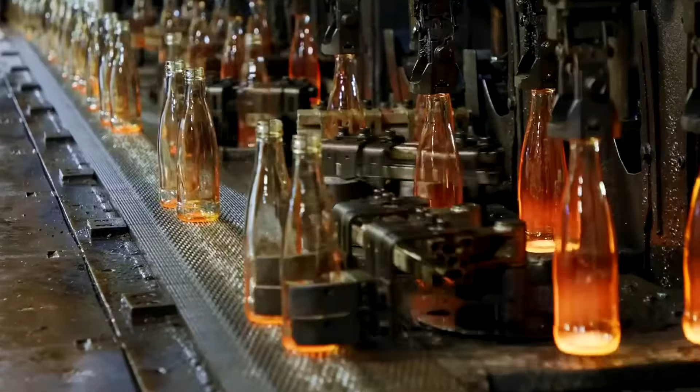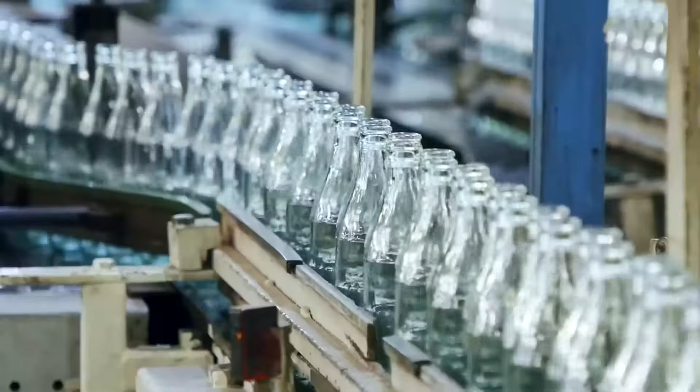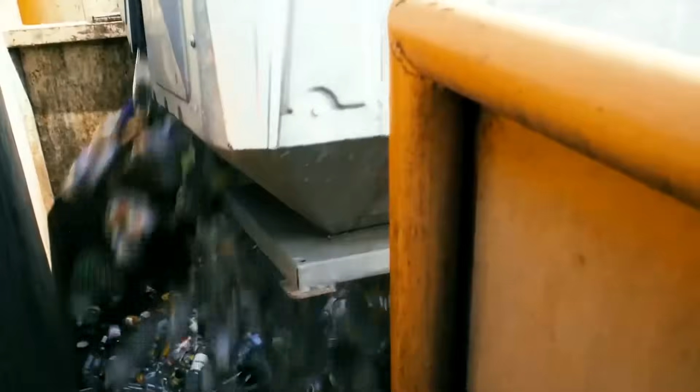But this material holds a remarkable secret. Glass can be recycled forever, reborn time and again, without any loss of its inherent quality or purity. The journey from messy, broken shards back into clean, shiny bottles is a testament to this unique potential. This transformation unfolds inside one of the world's largest glass recycling factories, where hundreds of tons are brought back to life every single day. Here we uncover the secrets behind the unbelievable journey of one of the most sustainable materials on Earth. An object designed to be discarded, yet it holds a hidden currency.

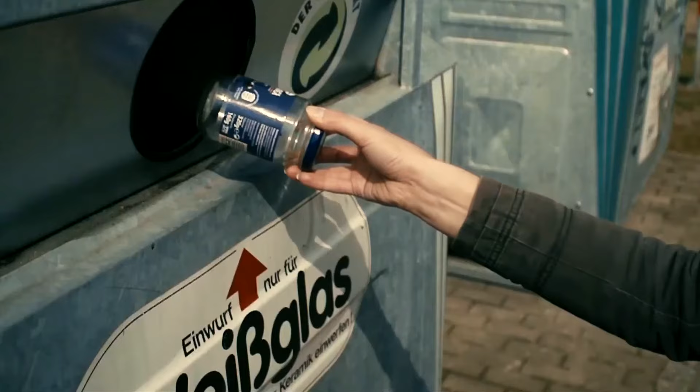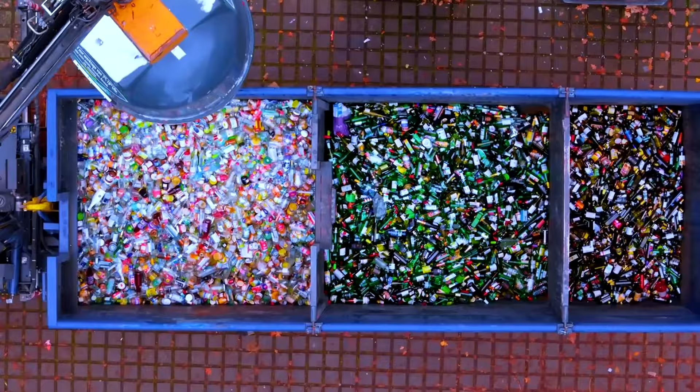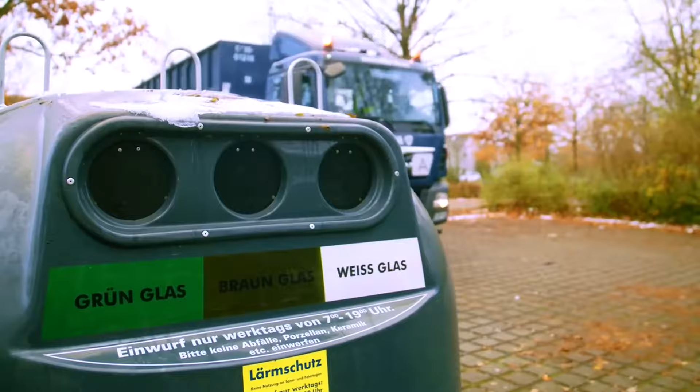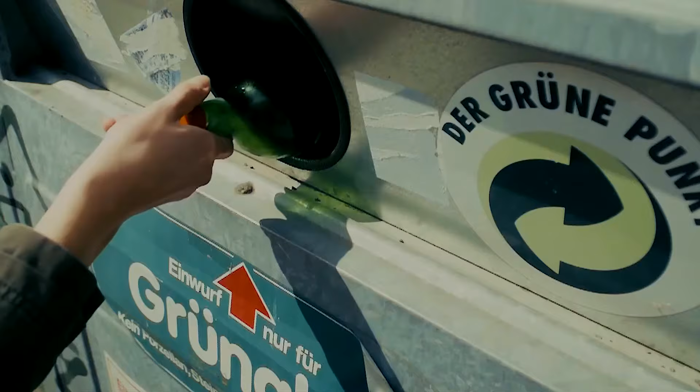The lifeblood of glass recycling is a steady supply of used bottles, but when they are mixed with household waste, sorting becomes a costly and complicated task. In many parts of Europe, an elegant system intercepts these containers right at the source. Automated return machines dot city streets, inviting people to deposit their empties. An internal scanner identifies each bottle before it is sorted, and the machine dispenses a small refund, usually around 10 to 20 cents. This simple transaction transforms a finished bottle from potential waste into a tangible asset, encouraging public participation and providing factories with a continuous flow of glass that is already clean, pre-sorted, and consistent.

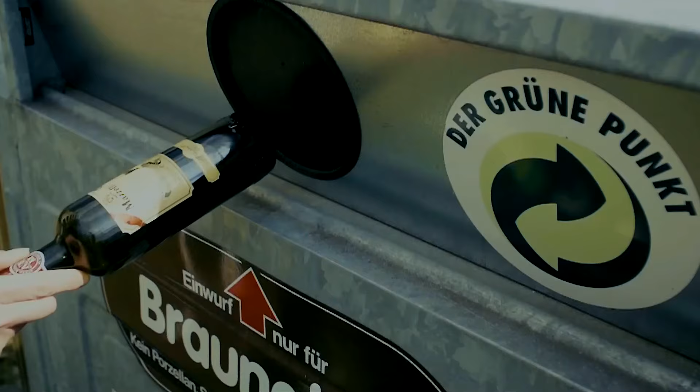Once these reverse vending machines reach capacity, specialized collection trucks are dispatched. Large plastic bins, each one brimming with thousands of empty bottles, are hoisted aboard by forklifts. A single truck can carry between 20,000 and 30,000 bottles in one trip, a load weighing approximately 10 to 12 tons, as it makes its way from collection points to the recycling facility.

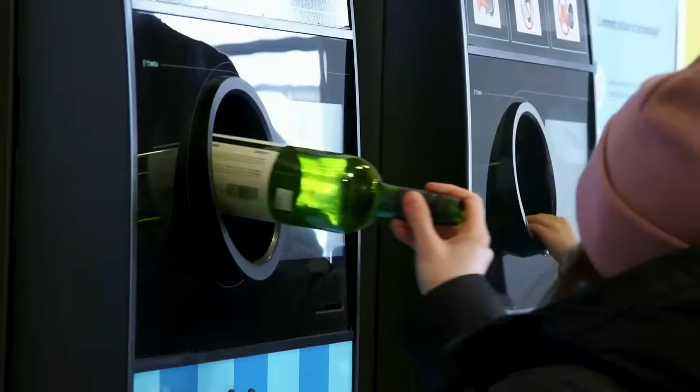Arriving at the plant, drivers back their trucks up to a massive storage bay and release the entire load. A cascade of glass tumbles out, the sound echoing as the ground fills with sparkling mountains of green, brown, and clear. These shimmering heaps are not an endpoint, but the genesis of the entire recycling process, a vast reserve of raw material waiting to be crushed and reborn.

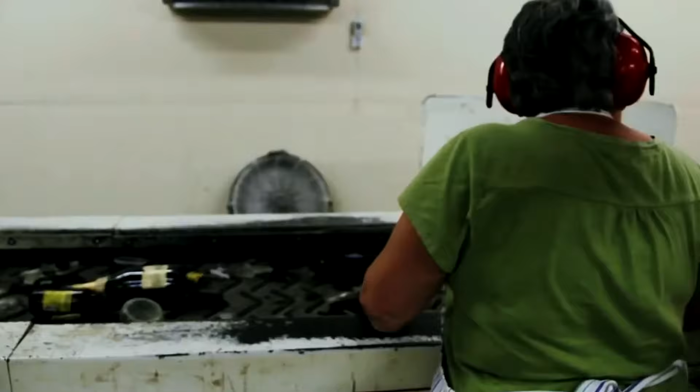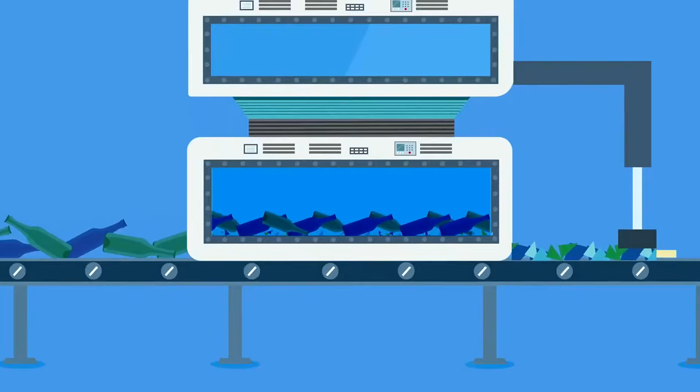It begins with a symphony of destruction. A mountain of discarded glass, shimmering under the open sky, is about to be reborn. Massive loaders ascend the towering piles of waste, their buckets scooping up enormous quantities of shattered material. They traverse the yard and, with a thunderous crash, empty their contents into the plant's feed hopper. A cascade of shards tumbles down a steel chute onto a waiting conveyor, which immediately begins to carry the stream of glass, dirt, and sand deep into the facility.

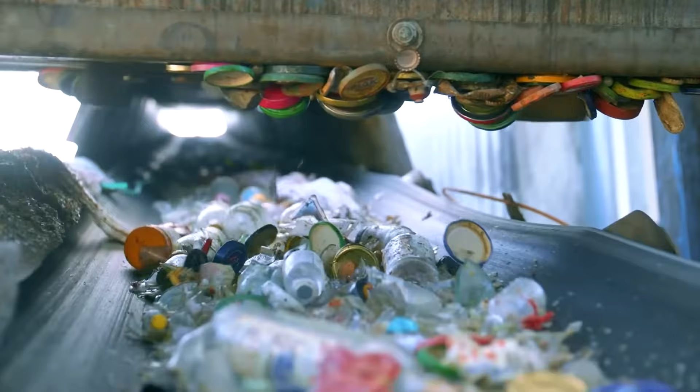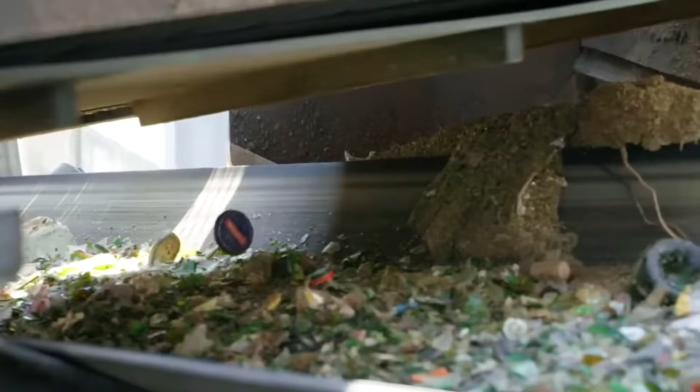The first stop is a vibrating screen, where powerful oscillations shake loose the finest particles of dust and grit. Following this initial cleansing, the glass is visibly cleaner, yet larger contaminants that elude simple mechanical detection still remain. Along the conveyor, vigilant workers stand ready, their hands expertly pulling out stray pieces of paper, plastics, and any other foreign objects. This careful combination of machine screening and human intervention yields a pure batch of material prepared for the next phase of its recycling journey.

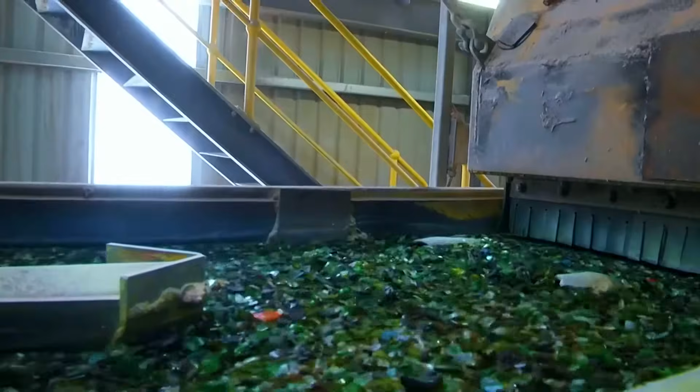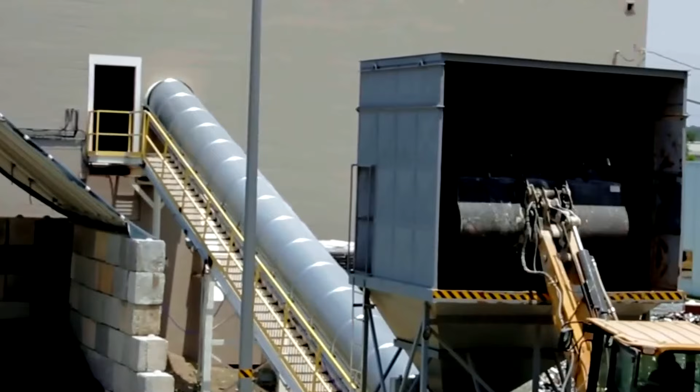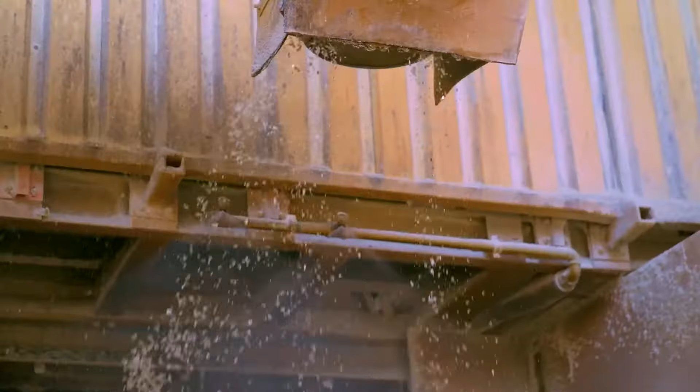But even now, something metallic still lurks within the river of broken glass: the bottle caps. Fortunately, most are made of steel, allowing for their simple removal by a high-powered magnetic separator. The principle is straightforward: a powerful magnetic field plucks the metal fragments from the flow, while the non-magnetic glass continues onward. Thanks to this crucial step, the stream of glass is now approximately 80% pure.

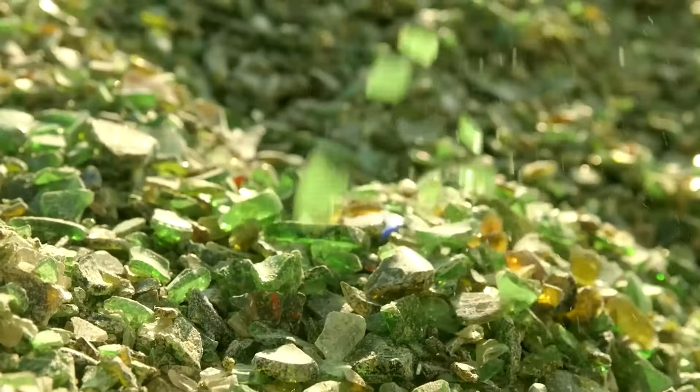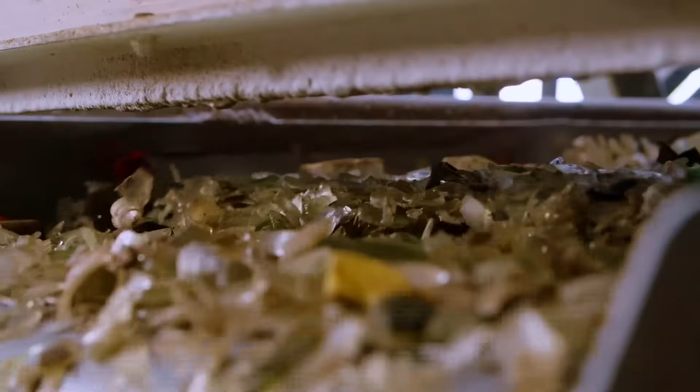With most contaminants gone, the glass proceeds to be ground into a substance known as cullet. Larger pieces are fed into a hammer mill, a colossal machine where high-speed rotating hammers pulverize the glass repeatedly. Any fragments that remain too large are automatically detected and rerouted through the mill until they achieve the desired size, ensuring the entire stream is perfectly uniform. This process creates a fine, sparkling material that resembles man-made sand. Because it is broken down into such small particles, cullet melts far more rapidly in a furnace, saving up to 40% of the energy required when using raw materials like sand or limestone.

From the mill, the cullet is transported to a powerful suction system where it is blasted with a strong current of air.

This intense airflow strips away and carries off any lingering paper label fragments.

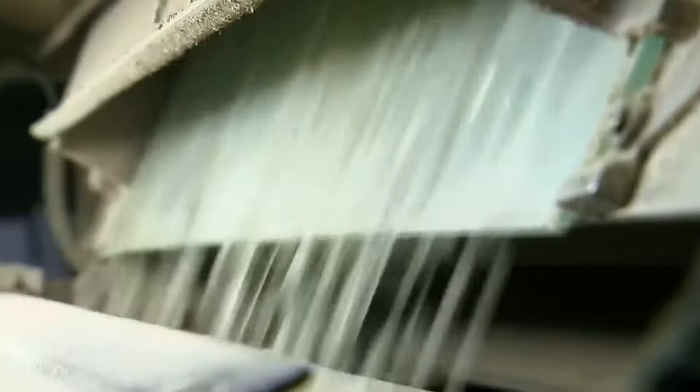Finally, the cullet moves into the optical sorting system, the most technologically advanced stage of the entire process. As the glass cascades downward like a shimmering waterfall, laser sensors relentlessly scan each tiny fragment, identifying its precise color and composition. The instant a piece of brown glass, green glass, or even a stray ceramic shard is detected, the system fires a targeted puff of air, diverting it into a separate stream.

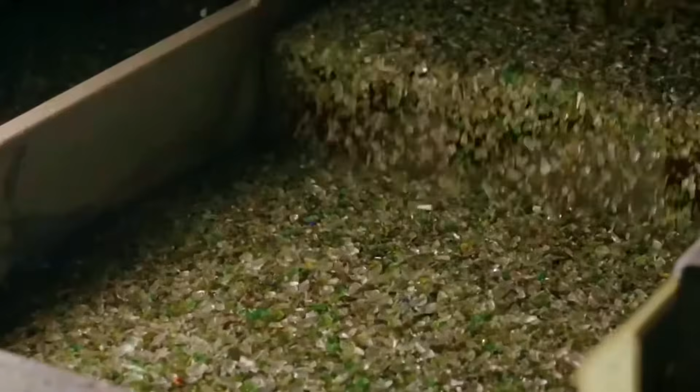The speed is almost incomprehensible, with tens of thousands of individual pieces processed every single minute. This astonishing precision ensures the cullet is sorted by color with near-perfect accuracy, as even the slightest mixture of a different shade would compromise the quality of the final recycled product.

Once sorted, the distinct streams of tiny glass particles continue along the conveyor, directed into separate storage bays divided by color. There, they accumulate into vast, shimmering stockpiles, awaiting their transformation into brand new glass bottles.

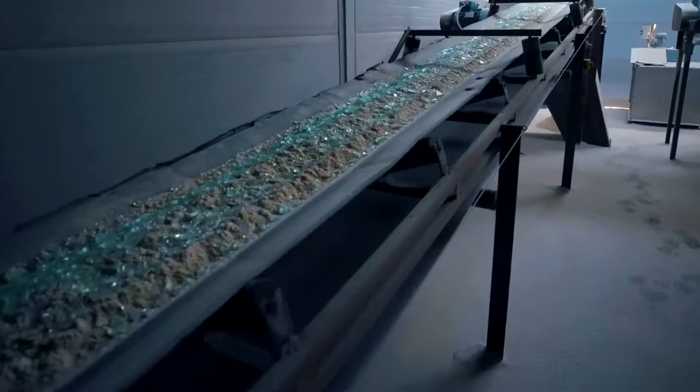It begins as a mountain of shattered fragments, waiting for a fiery rebirth. This ground cullet, now a fine powder, isn't yet ready for the furnace. It must first be combined with a precise blend of raw materials.

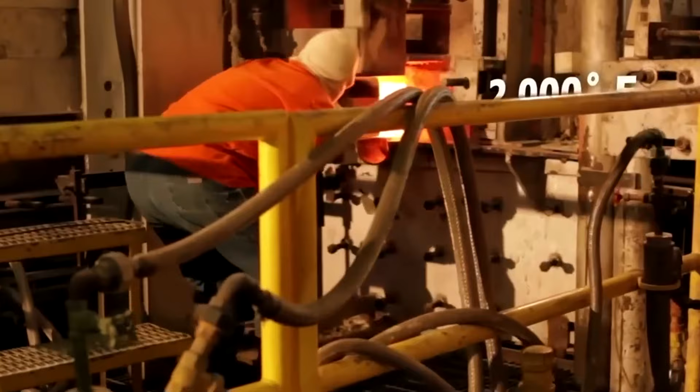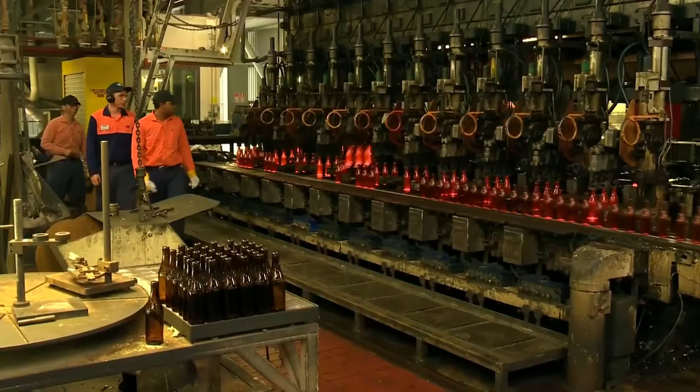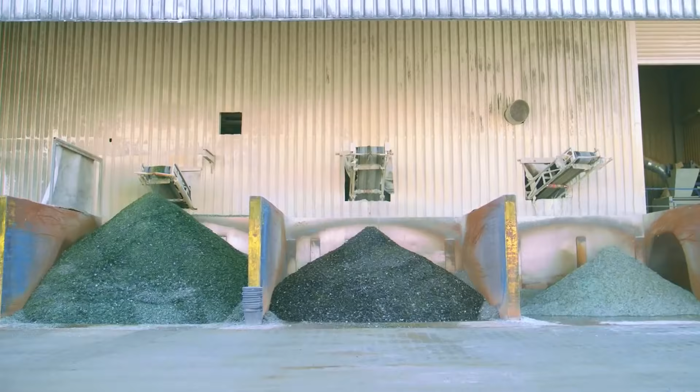The foundation of this mixture is pure silica sand, the very element that grants glass its signature clarity. Soda ash, or sodium carbonate, is introduced to lower the melting point, a critical step for conserving energy. Limestone follows, lending strength and stability to the final product. Specialized formulas might also incorporate dolomite, alumina, or metal oxides to fine-tune color and other physical properties.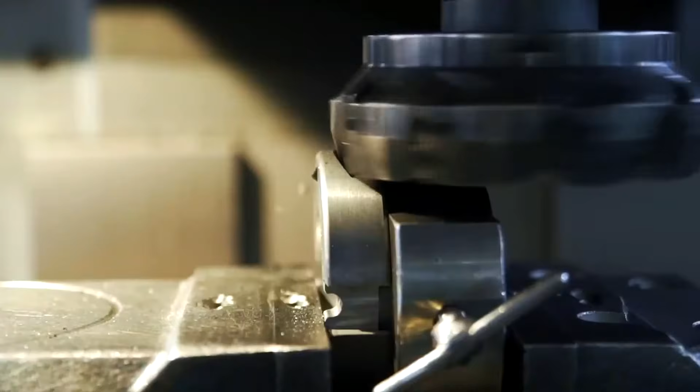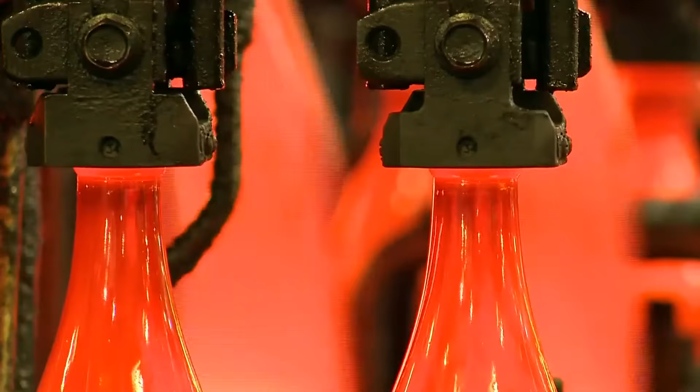Yet, the recycled cullet remains the most vital component, constituting anywhere from 20 to 70% of the total batch. Its presence accelerates the melting process, slashing energy consumption by as much as 40% compared to using virgin materials alone. Even a modest 10% increase in cullet can decrease energy use by roughly 3%, while also making a significant dent in carbon dioxide emissions.

Following the factory's precise recipes, the ingredients are thoroughly blended, creating a uniform mixture now prepared for the crucible. This blended material is then channeled into a colossal gas furnace. Inside, temperatures soar to approximately 1,750 degrees Celsius, an environment hotter than volcanic lava.

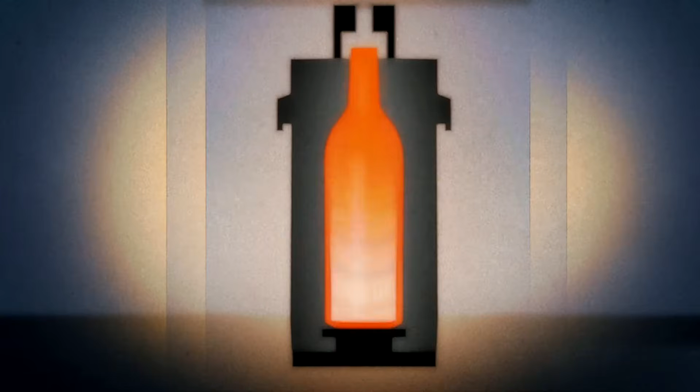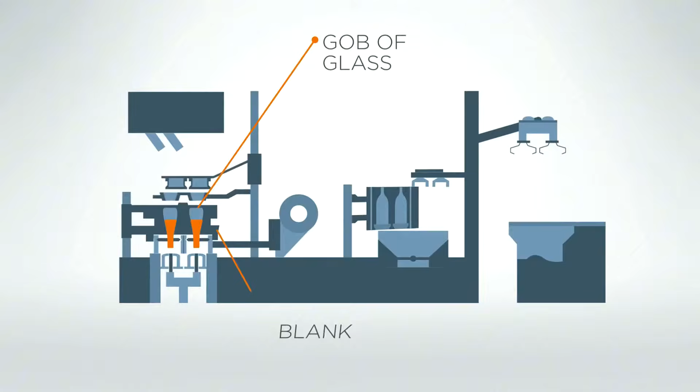Technicians oversee the transfer as the mixture is poured into specialized crucibles. Within the facility, the ambient heat approaches an almost unbearable 3,000 degrees, forcing workers to don fireproof suits and heavy gloves for protection. As the ingredients begin to stabilize, the mouth of each crucible is sealed, trapping the immense heat and allowing for a controlled, even melt.

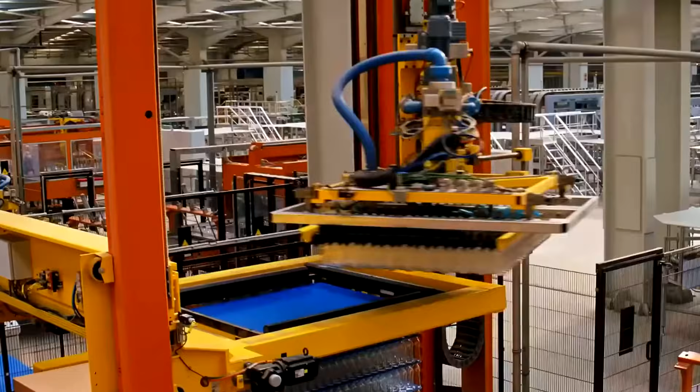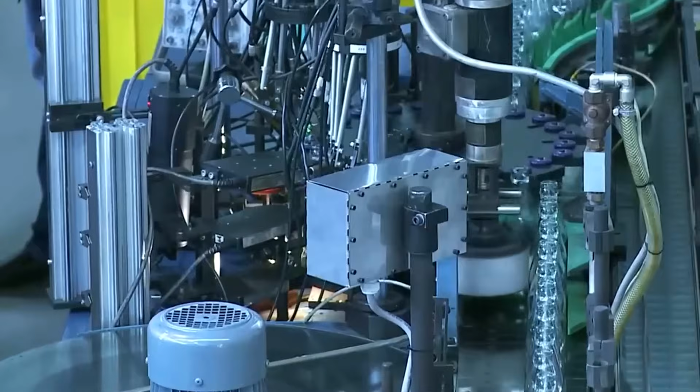After 24 hours, the granular mixture has vanished. In its place, a substance flows with the thick, deliberate pace of lava. This brilliant glow emanating from the furnace floor is liquid glass, a dense, incandescent mass that has achieved the perfect temperature and viscosity. For the next 5 hours, the glass is held in this molten state, allowing any trapped gases to escape and ensuring the utmost purity in the final material.

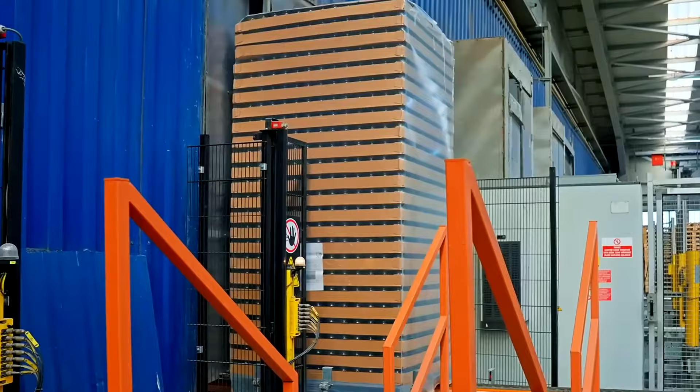To give this liquid form, a mold is essential, and its creation is a science in itself. Engineers employ advanced CAD software to design each mold with microscopic precision, meticulously defining every curve, dimension, and wall thickness to meet exacting technical specifications.

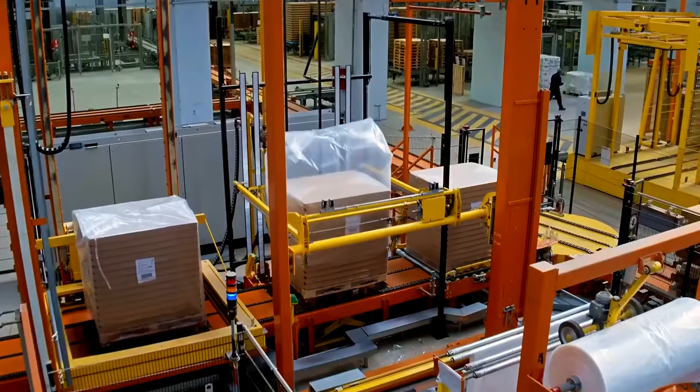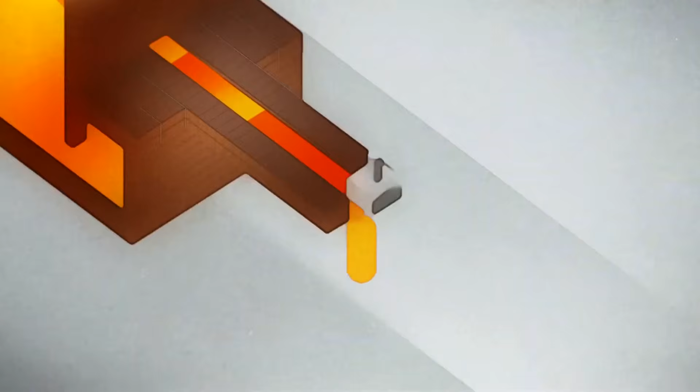From these digital blueprints, the physical molds are forged from cast iron or alloy steel, materials robust enough to endure temperatures reaching up to 1,400 degrees. Once complete, the molds are carefully installed into the blow-and-blow production line. This is one of the most trusted and widespread methods for creating hollow glass products, from soft drink bottles and food jars to pharmaceutical containers.

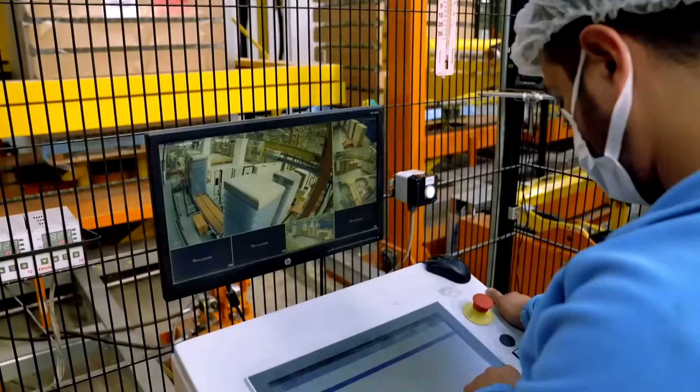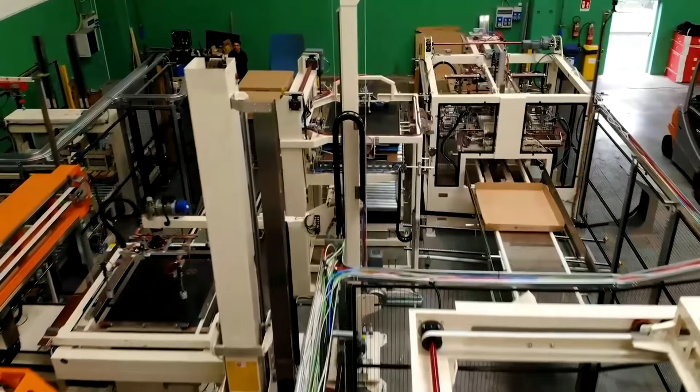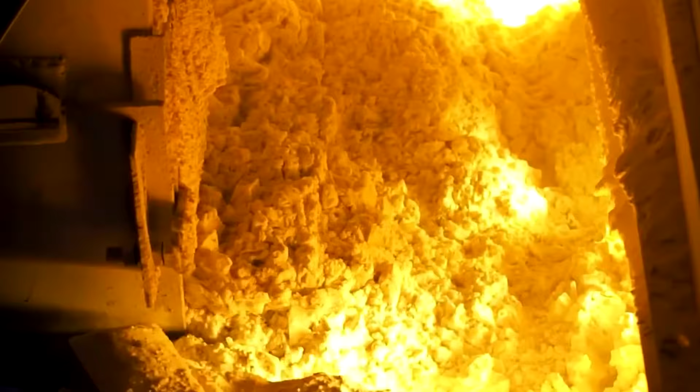The process ignites as searing portions of molten glass, known as gobs, are dropped into the initial blank mold. Sheared from a continuous stream, these gobs arrive at temperatures around 1,100 degrees Celsius, possessing the ideal viscosity for smooth and uniform shaping. Inside this preliminary mold, a jet of compressed air blasts from above, forcing the pliable glass against the mold's interior walls. This action creates the initial form, a hollow, bubble-like structure with a narrow neck, known as a parison. Still radiating an intense heat, the parison is gently transferred to the final mold, positioned just inches away.

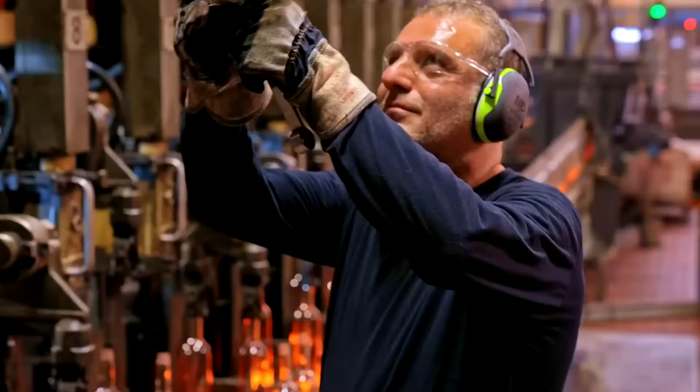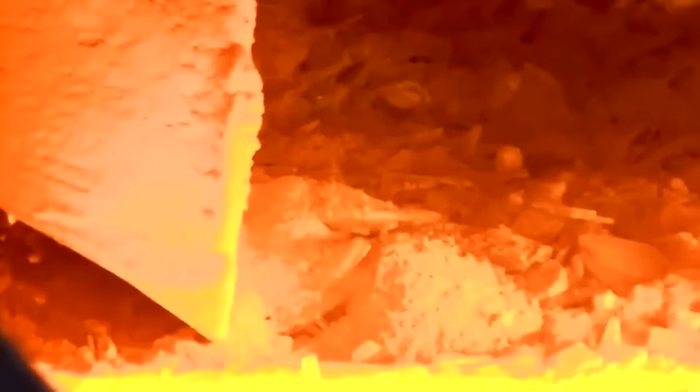A second, more powerful burst of compressed air is injected into the glass's core, expanding the softened glass until it conforms perfectly to every detail of the final mold's inner surface. In a matter of seconds, the complete bottle takes shape.

From the outside, the process appears deceptively simple, but behind the curtain of fire and steel, every valve and sensor is synchronized with breathtaking accuracy, timed down to the thousandth of a second. This extraordinary level of control enables the production of hundreds of thousands of bottles each day, each one emerging as a near-flawless twin of the last.

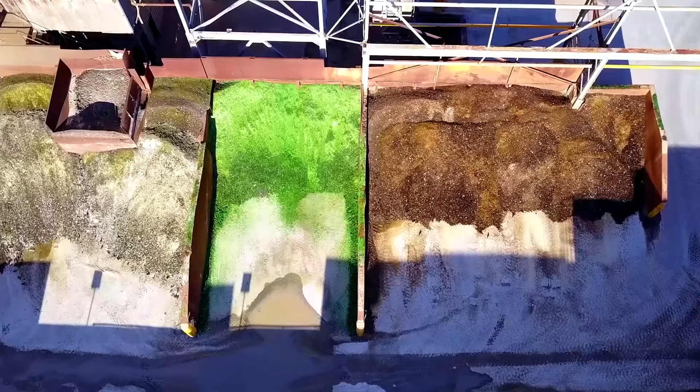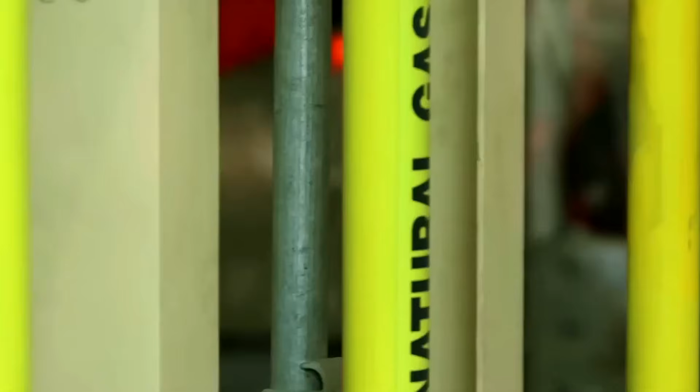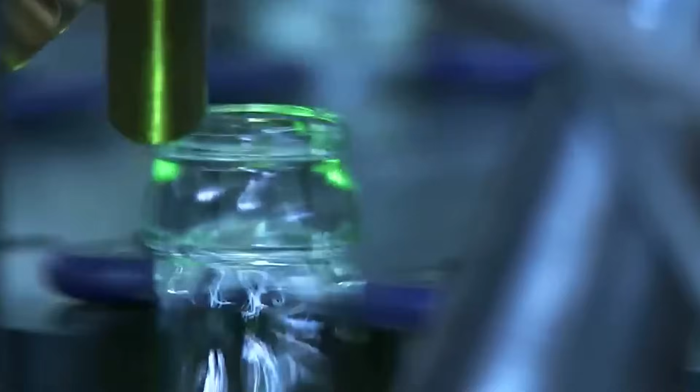Fresh from the mold, the bottles radiate a deep crimson heat, their surfaces shimmering like glowing metal rods in the dim light. Robotic arms sweep in with fluid, programmed grace, gliding effortlessly to their designated positions. Each bottle is lifted with delicate precision and placed onto a conveyor. The entire sequence unfolds in a quiet, synchronized ballet, devoid of any rush or hesitation.

The conveyor slowly carries the newly formed bottles, their bases still aglow, toward the cooling zone. They journey through a long, illuminated tunnel where the temperature is methodically reduced. This gradual cooling, known as annealing, allows the glass to stabilize without shattering under thermal stress. This deliberate stage can last several minutes, sometimes extending to tens of minutes, ensuring structural integrity.

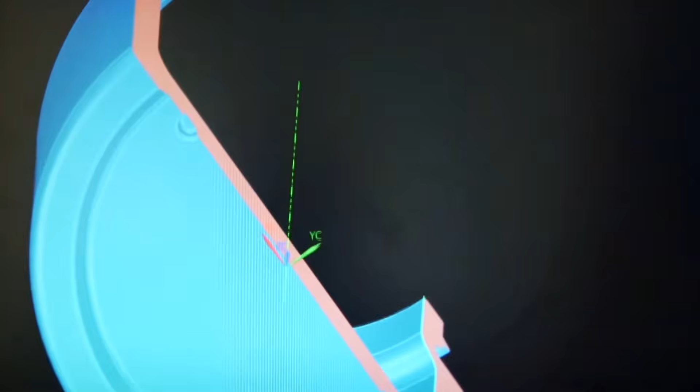As the journey continues, the cooled bottles arrive at the inspection stage. Here, a sophisticated array of optical sensors and high-speed cameras scrutinizes each one in real time. The moment a defect is detected, be it a crack, a bubble, a scratch, or the slightest warp, the system instantly flags the imperfect bottle and removes it from the line.

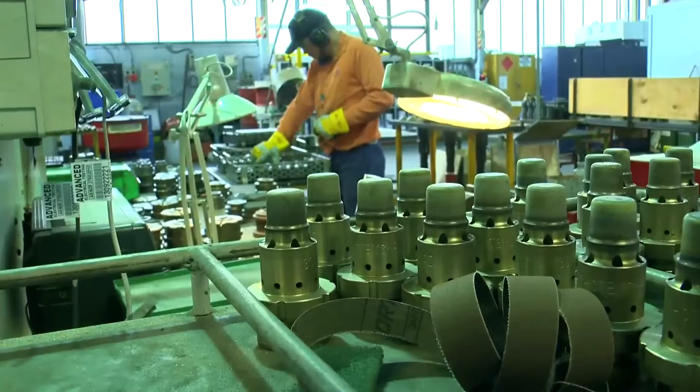The next phase of quality control zooms in on the bottle's mouth. An automated system rotates each bottle with precision, while a combination of optical sensors and mechanical probes inspects for any flaw. A chipped edge, a hairline crack, or the most minute dimensional deviation will not go unnoticed. Only those bottles that pass this rigorous examination are permitted to continue down the line.

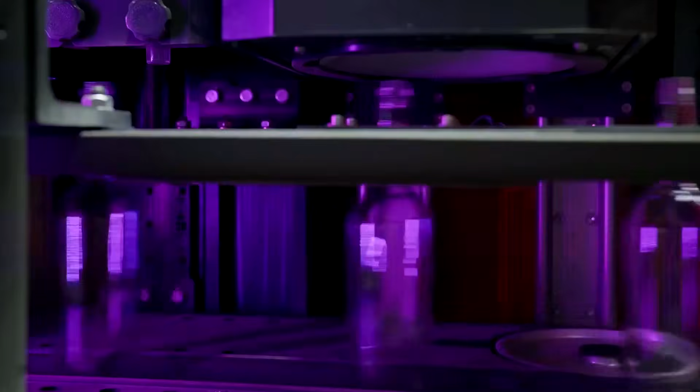Having cleared every inspection, the glass bottles are conveyed to the palletizing area, where robotic systems once again take command. Engineered for unparalleled accuracy and consistency, these machines effortlessly arrange thousands of bottles into perfect formation. A specialized clamp, fitted with suction cups, descends to grip an entire row, lifting and setting it gently onto the pallet.

To cushion against impacts during transit, a protective sheet is inserted between each completed layer. Once the stack is complete, an automated wrapper envelops the entire pallet in protective film and applies a tag, coding it to its specific production batch. These finished pallets are then transferred into storage, where they are neatly arranged awaiting shipment. From this warehouse, they will embark on journeys across the globe, soon to become the familiar, sparkling containers we see every day.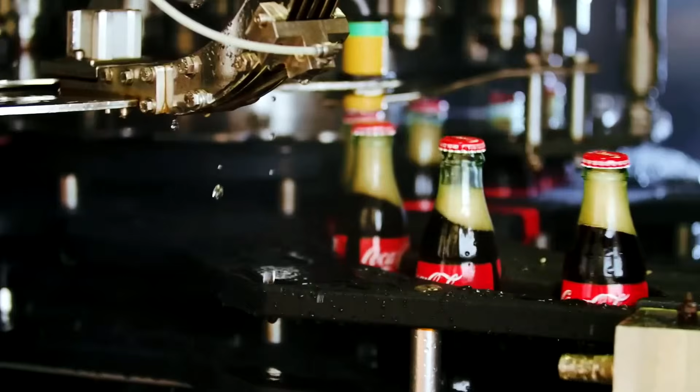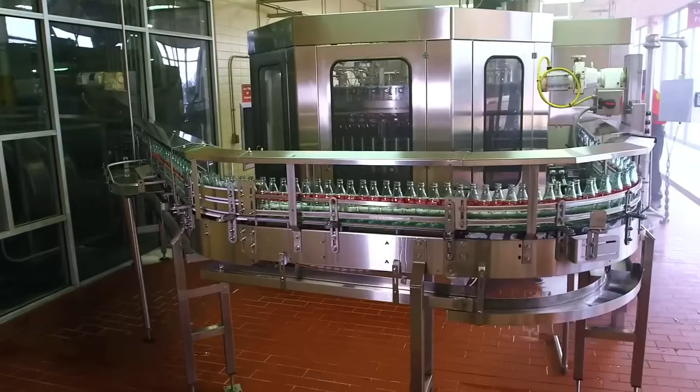It is a shape recognized across the world, a vessel for a taste known by billions. But before it ever reaches a hand, it must pass through a symphony of steel and precision. The journey begins with a baptism of fire and water. High-pressure jets of hot water and steam scour every surface, purging any trace of dust or bacteria.

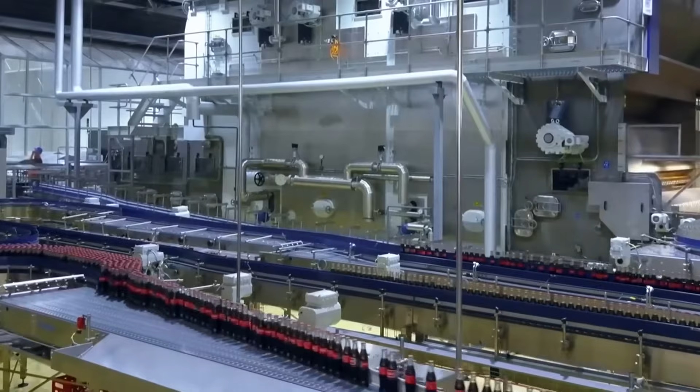The bottles then glide along a high-speed conveyor to the filling station, where automated nozzles dispense the iconic liquid down to the exact milliliter. Simultaneously, a charge of CO2 gas is injected, locking in that signature fizz. With no time to spare, the filled bottles proceed directly to the capping station.

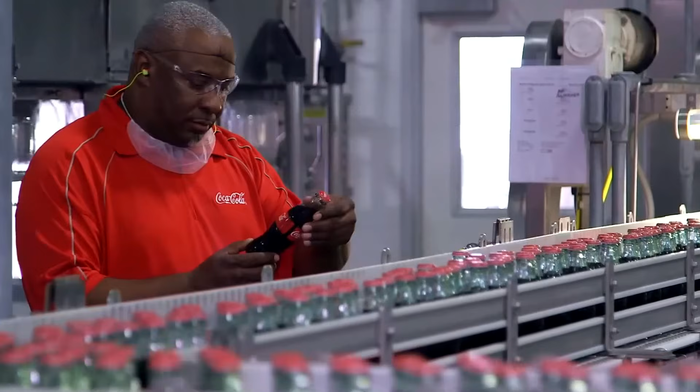Here, precision machines press gleaming crown caps firmly into place. High-precision sensors integrated into the line then scrutinize every cap for tightness, a critical step to ensure a perfect seal and prevent even the smallest leak.

Next, each bottle passes before a high-speed camera system, which scans for any cracks, incorrect fill levels, or misapplied labels. Lined up in perfect formation, the bottles continue their smooth, rhythmic journey, moving like a programmed assembly through each stage. As they reach the water spray station, a high-pressure jet of cold water is aimed directly at the neck of each one.

Finally, the perfectly sealed bottles are packed into cartons, loaded onto pallets, and moved into cold storage. They are now ready for shipment to millions of destinations across the globe, from small roadside shops to luxury hotels. A cycle closes, yet the material itself is immortal.

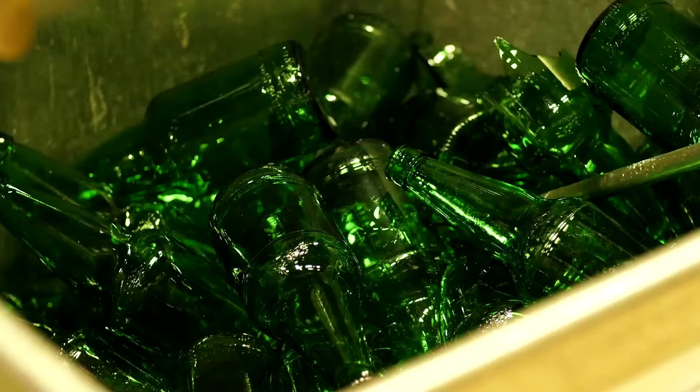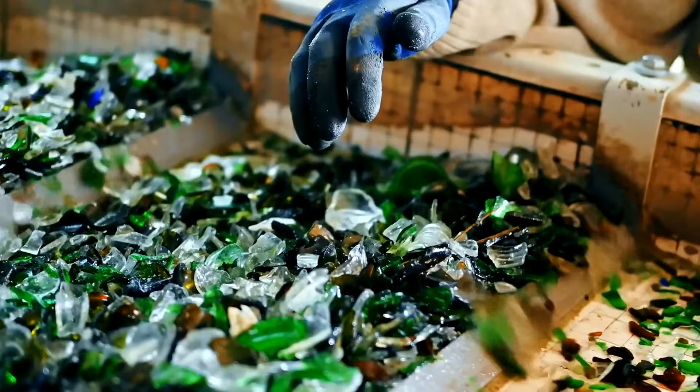The long journey from fractured shard to pristine vessel has reached its conclusion. What was once discarded and broken is now reformed, emerging as a gleaming, perfect object, its value fully restored. This remarkable transformation is not merely a victory for environmental stewardship. It stands as a powerful testament to the ingenuity of modern industry, showcasing a circular process where nothing is wasted and everything can be made new again.